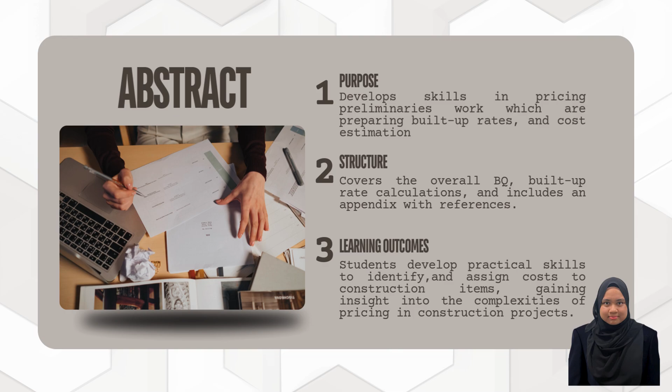In the construction industry, preliminary is an important element that includes the financial and logistical considerations required for a project to be completed successfully. In preliminaries, build-up rates is the method used to calculate the costs related to the initial phases of a construction project. Build-up rates is important for managing the administrative and logistical elements that support the actual construction process. In conclusion, preliminary items is an essential element in construction contracts that offer an outline for efficient project management.

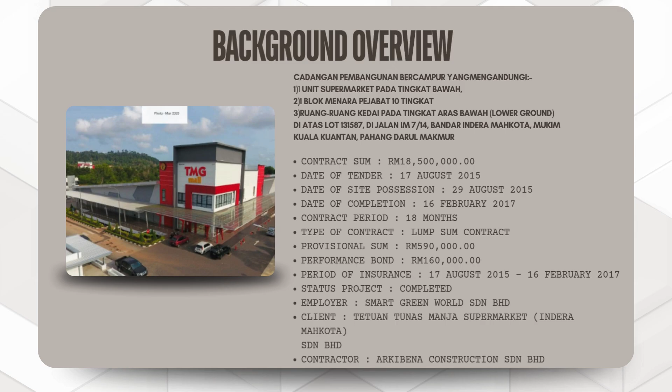The employer is Smart Green World Sendirian Berhad. The client is Tetuan Tunas Manja Supermarket, Indera Mahkota Sendirian Berhad. And the contractor is Arkibena Construction Sendirian Berhad.

Next, on this slide we show the actual bill of quantity from this project. There are 32 preliminaries items in this 18 million project, but for this assignment, we only chose 20 items of preliminaries to come up with the current amount or cost for each item, which means each of us had to take 5 items to present.

So I will start with the main subtopic, which is build-up rates. I chose 5 preliminaries items, which are plant equipment and vehicle, first aid kits, water supply, and temporary holding and storage.

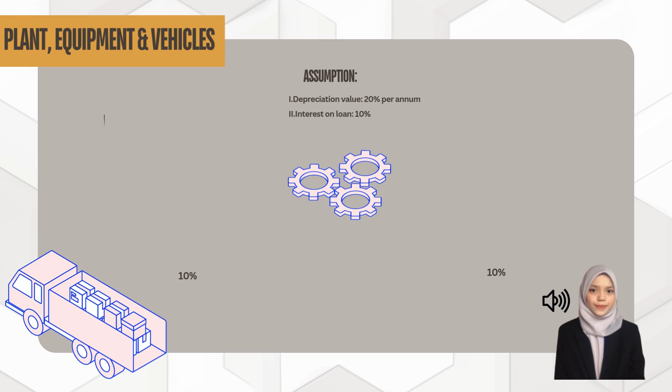The first item is plant equipment and vehicle. In construction, this item refers to the machinery, equipment and tools used for any project, either building or infrastructure. The contractor should provide the plant and equipment to carry out and ensure the construction activities run smoothly. As shown in this slide, first thing first, we must determine whether the project involves rent or purchase for each item.

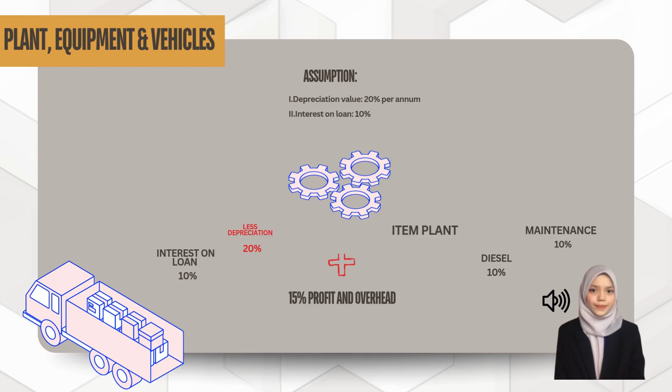The total cost for that item will be added with the 10% interest on the loan, and after totaling up the cost, then must deduct a depreciation of 20% with the year of the project, which is 1.5 years.

The next part, rental item, contains a crawler crane, 2.5 ton forklift and mobile crane. Total up the amount and add 10% for each diesel and maintenance. Lastly, add a 15% profit and overhead, and the cost is 892,495 ringgit 96 cents.

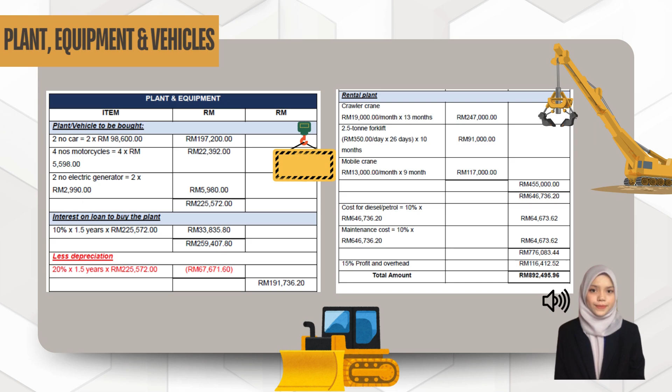A first aid kit for a construction site is specifically made to handle any accident or injuries that might happen on site. The contractor is responsible for providing and organizing all the components in the first aid kit at the site office. A first aid kit is important and has been issued by the Department of Occupational Safety and Health, Ministry of Human Resources Malaysia, to be performed by a first aider during an emergency until medical personnel arrive.

For this project, first aid kits should be more than one because this is the biggest project, and should be enough for all the workers. I got this price from Vitalfour Medical. This company is a Malaysian top-rate first aid kit manufacturer and offers certified kits and trusted products. The total cost for 2 stocks of first aid kits is 1,872 ringgit 94 cents.

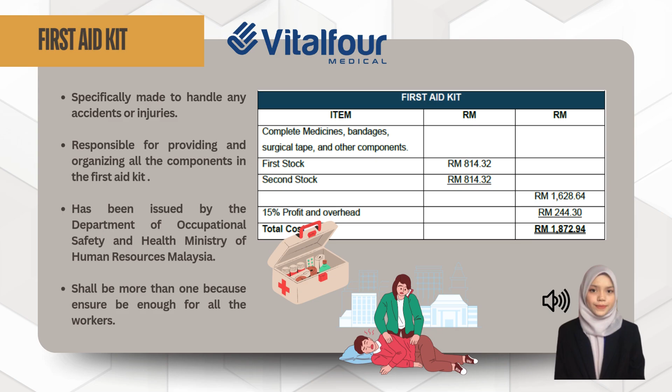A temporary water supply on a construction site is a short-term water source made available while the project is being built. The contractor should provide this for construction-specific activities like mixing concrete, curing, and cleaning equipment, to guarantee workers have access to water for drinking, sanitation, and dust control. There are 2 steps to calculate this cost.

First, installing the services contains fixing pipe, 1,715 gallons water pump, and water bills. Then the cost for dismantling all items on completion contains the rental lorry and labor.

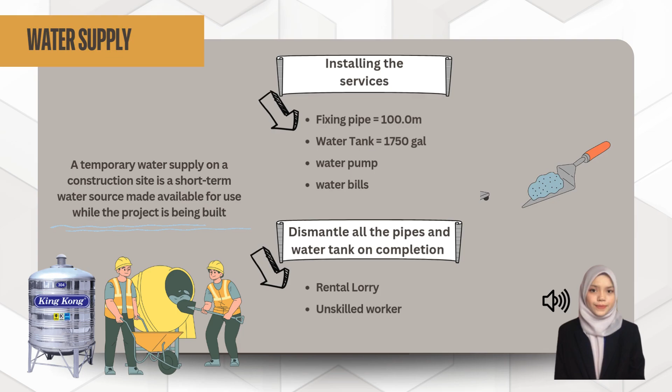For the price of fixing pipe, I assume 60 ringgit per meter. Water tank from the King Kong Company product, and water bills I assume 400 ringgit per month. For lorry rental, I got the price from the quantity surveyor online website, and unskilled labor is 85 ringgit per day from the JKR rates.

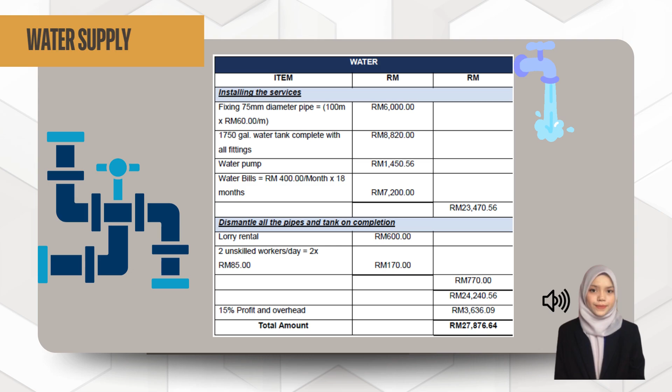The total cost for the water is 27,876 ringgit 64 cents. Temporary hoarding is a barrier or fence erected around a construction site to secure the area, protect the public from hazard, and reduce noise and dust pollution.

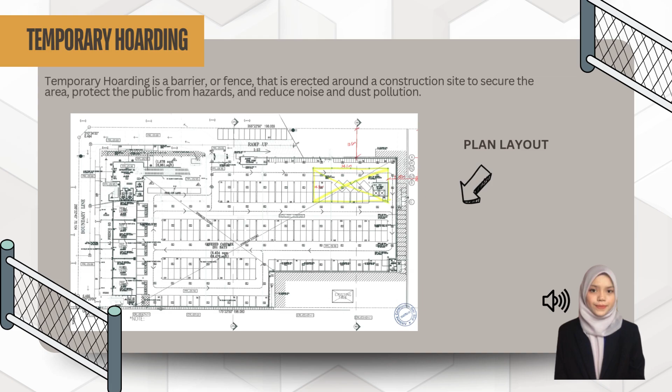As shown in this slide, this is the plan layout for this project. The hoardings will cover around the construction site. After measuring the perimeter around the site, the hoarding needs 550 meters, and I got the price per meter for hoarding, 110, from the quantity surveyor online.

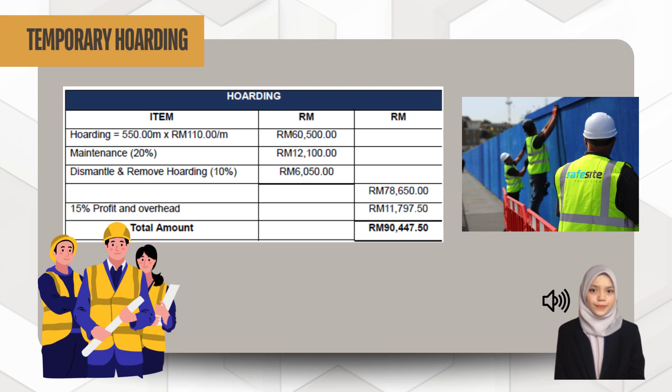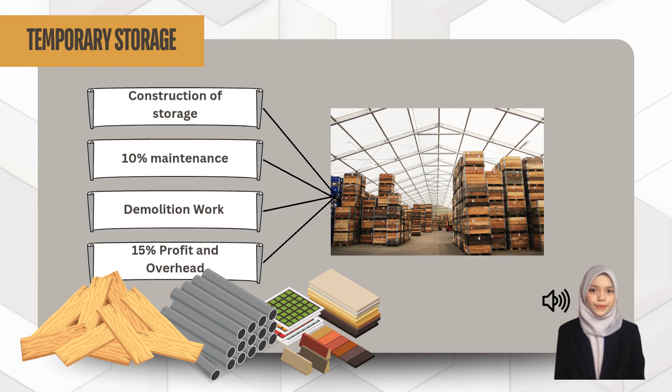The total cost for temporary hoarding is 90,447 ringgit 50 cents. As stated in the slide, temporary storage contains 4 components: the construction of the storage, 10% maintenance, demolition work, and profit and overhead. These storage spaces are essential for maintaining the site's organization and protecting material from environmental elements, stealing, and destruction.

So here are the build-up rates for this storage. The cost for construction of storage will be added with the cost of demolition work, and then from the total we add the profit and overhead at the standard percentage, which is 15%, to get the total cost for the storage.

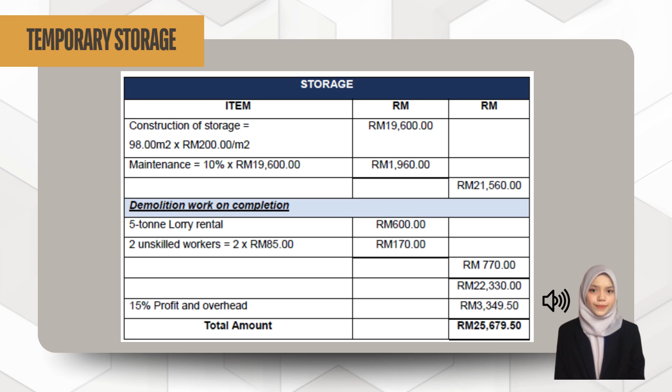The next item to be considered in the preliminary items is level and setting out, also known as a site survey. A site survey is the process of conducting a thorough examination and assessment of a proposed construction site before any development and construction work begins, to obtain data and information.

To find out the total amount for site survey, land surveyor professional fees and surveyor equipment need to be taken into account. Border setting out and grid setting out are part of the professional fees. As for the surveyor equipment, the cost of theodolite and dumpy level need to be counted.

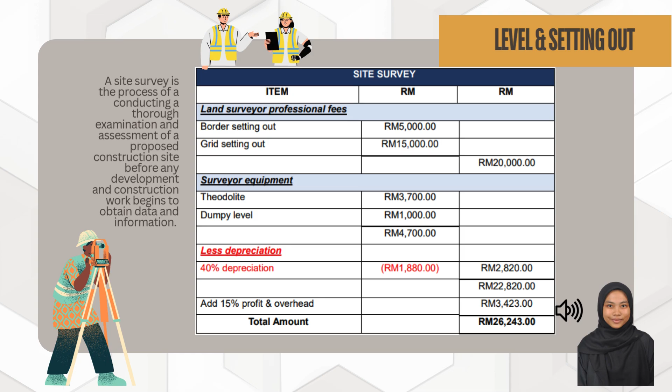After totaling the cost of professional fees and surveyor equipment, the total amount needs to be deducted by 40% depreciation. Finally, profit and overhead is added at the rate of 15%. So the total amount for site survey for this project is 26,243 ringgit. The next item for build-up preliminaries is contractor all-risk insurance (CAR).

Contractor all-risk insurance protects against losses and damages that can occur during construction projects, such as property damage, third-party claims, construction plant and equipment, and clearing debris. To find out the rate of contractor all-risk, two items are taken into account.

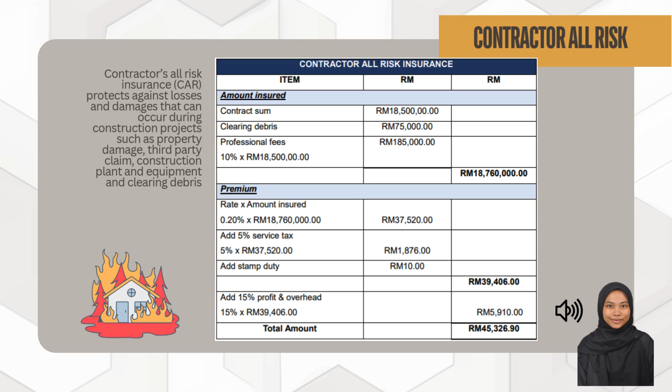The first item is contract sum, clearing debris, and professional fees added together. The second item to be considered is premium: a rate of 0.20% times the total amount insured. 5% service tax and stamp duty of 10 ringgit are added into the cost.

15% profit and overhead is taken into account to find out the final amount. The total amount for contractor all-risk insurance is 45,326 ringgit and 90 cents.

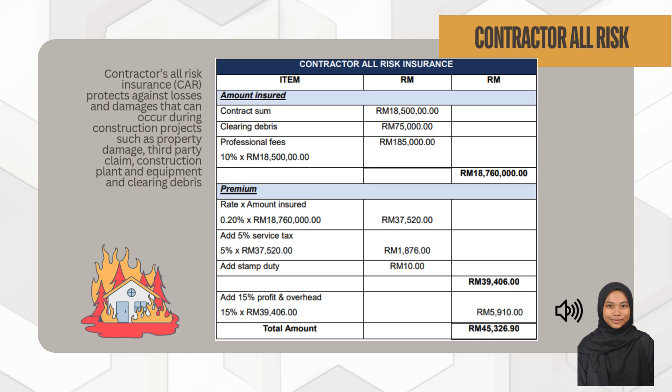The next item is SOCSO, the Social Security Organisation, also known as PERKESO, a Malaysian government agency that provides social security to employees in the private sector in case of workplace injuries, emergencies, occupational sickness, and death. Contribution to SOCSO is mandatory for every worker under a contract of service in the private sector.

To determine the total amount of SOCSO, the estimated monthly salary of the workers is calculated. This data is obtained based on checkout rates online. The total monthly salary of the workers is multiplied by the project duration. The client's contribution at a rate of 1.75% is added to the calculated amount, then profit and overhead is added to get the total amount.

The total amount for SOCSO is 50,624 ringgit and 44 cents.

The next item to be considered is temporary electricity supply. Temporary power supply is a connection on site to give an electrical supply for the construction works. Cost components to be considered include the wiring cost and other related equipment, monthly bill, deposit to the relevant authorities, and dismantle costs after completion of the project.

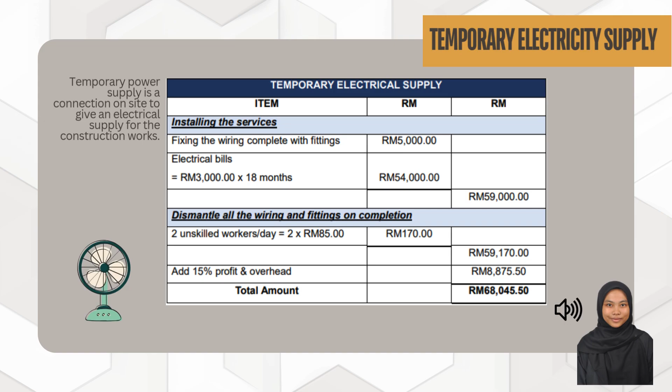For this element, it is divided into two parts: installing the services fees and dismantling all the wirings and fittings on completion. The total amount for temporary electrical supply is 68,045 ringgit and 50 cents.

The next one is signboard. Signboard must be prepared, installed, and well maintained by the contractor at the project site, stating the title of the project and the name list of parties involved. After completion of the project, the signboard needs to be demolished.

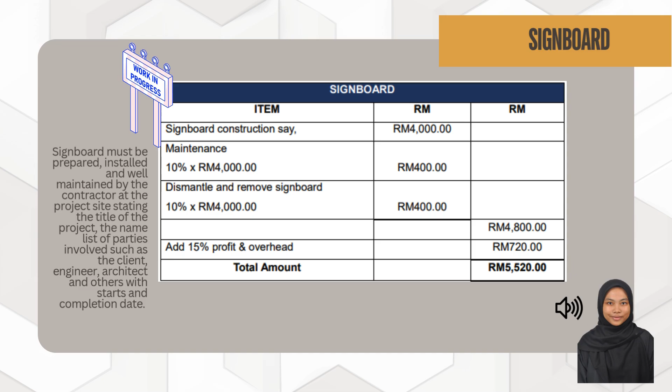To find out the cost of signboard for this preliminaries item, signboard cost needs to be added with 10% of maintenance and 10% for dismantling and removing signboard cost after completion of the project. The total amount for the signboard in this project is 5,520 ringgit. The next item is workman compensation.

Workman compensation is the insurance that shields employers from legal liabilities to offer monetary compensation to employees who are injured at their place of work or those with work-related illness. It includes injuries and diseases that happen while the employee is under the employer's service.

For the calculation, I assume the rate is 2% and estimated worker income is 10% of the contract sum. The contract sum here is 18,500,000. We need to add 5% service tax and 2 ringgit for stamp duty. The total after 15% profit and overhead is 44,679 ringgit and 80 cents. The next item is temporary workman accommodation.

This means housing facilities which are provided to the employees for work during their period of temporary or contract employment. This type of accommodation provides no more than living facilities such as sleeping, eating, and washing facilities, which may be located near the place of employment. It is typical for sectors like construction works, agriculture, or events when employees can be temporarily on the move.

The housing options are often basic and inexpensive and may include the sharing of certain areas such as dorms or kitchens. They can be temporary structures like modular buildings, or normal structures which have been converted for the purpose. These types of housing are normally offered by employers so that employees can be close to the workplace, hence their welfare during their working lifetime be guaranteed.

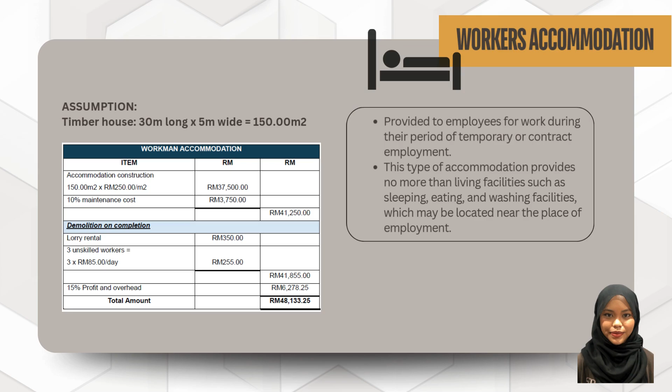For the calculation, we assume the timber house is 30 meters long by 5 meters wide, so the total is 150 meter square. We need to allow 10% maintenance cost, and for the demolition after construction completes, we need to rent a lorry and hire 3 unskilled workers. The total for workman accommodation will be 48,133 ringgit and 25 cents.

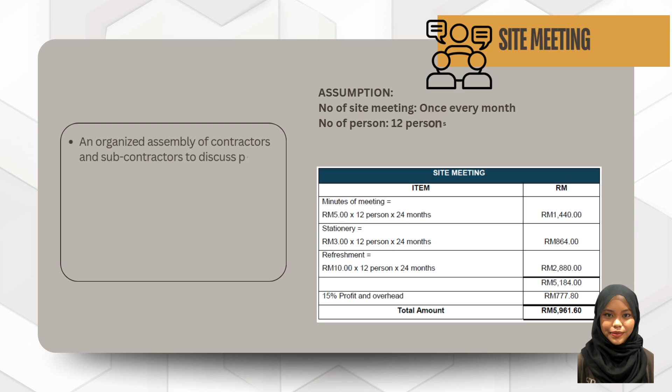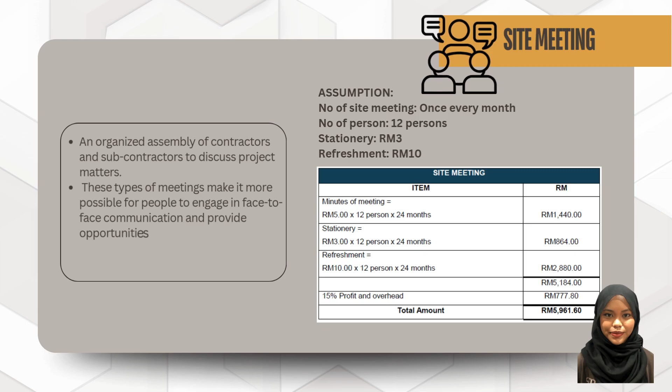The next preliminaries item to be considered is site meeting. Site meetings can be defined as an organized assembly of contractors or subcontractors to discuss a given project's matters. These types of meetings make it more possible for people to engage in face-to-face communication and provide opportunities to ensure the understanding of project goals and objectives, schedules, and expectations. Small group communication assists in fostering mutual understanding and agreement on certain goals since it facilitates pooling of effort.

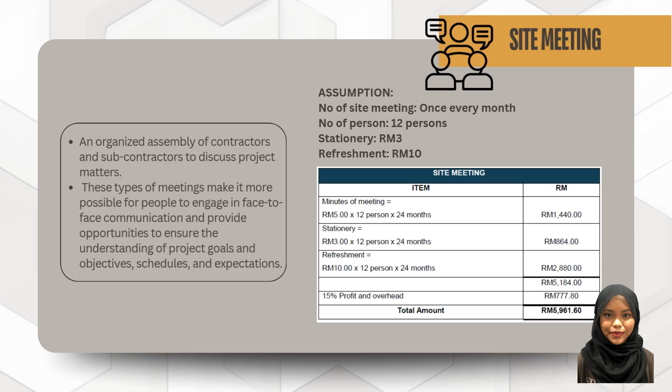For this project, we assume the site meeting will be held once every month, with 12 persons, and the stationery will be RM3 per person and RM10 for refreshments. For the calculation, we multiply the items by 12 persons and 24 months. The total will be 5,961 ringgit and 60 cents.

Progress photograph is applied for the observation of the flow of construction plan, revision, and enactment of safety measures on the construction site. Construction photograph also serves to confirm that construction has been done well.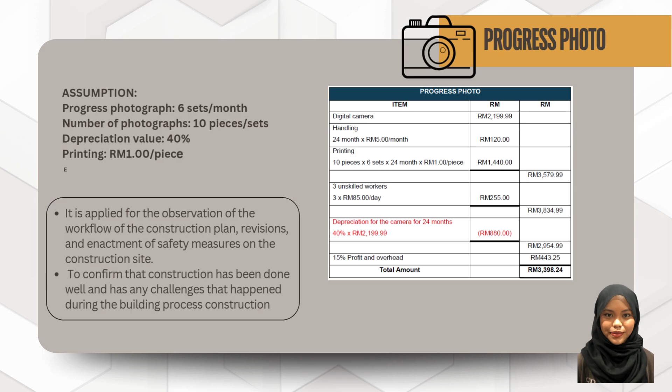Construction photography is the best document to prove and a visual insurance policy, aimed to capture mistakes, assigning contracts, checking independent MEP, trade contractors, and marketing service. When the construction project is accused of causing harm to a neighboring party, pre-construction photo documentation offers proof of the state of the property before construction begins.

This simple and low-cost documentation is often admissible in court and may be taken at set intervals during the construction process to show new conditions or lack of responsibility in case there is harm to the neighbor's property. Construction progress photographs may be used to record contractual completions, advertising images for promotional presentations in the media, or to demonstrate skills in bid proposals.

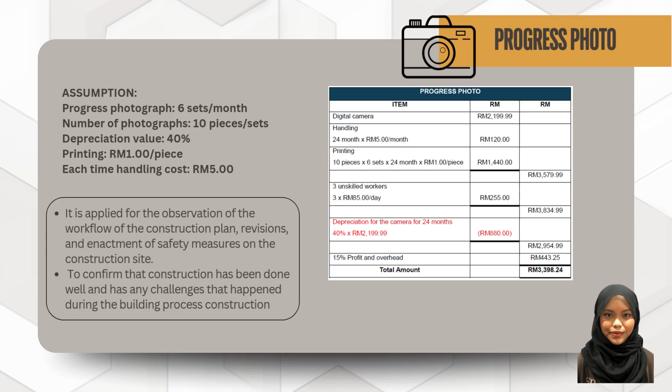We assume in this project, progress photograph is 6 sets per month. Number of photographs is 10 pieces per set, and we need to allow depreciation value of 40%. For the calculation, we need to hire 3 unskilled workers and less with depreciation for the camera for 24 months. The total will be 3,398 ringgit and 24 cents.

Telephone as a communication instrument is crucial in construction since it facilitates interaction of the workers, managers, and other stakeholders who are in different locations. As a real-time communication tool, it enables users to schedule tasks, deliver on-site materials, and address other on-site issues. In emergencies, the telephone can be used to report or gather response quickly, thus improving safety measures on scene.

Furthermore, it makes quick decisions to create efficient and fast project planning and updates all the stakeholders involved in constructing the building to enhance the construction process.

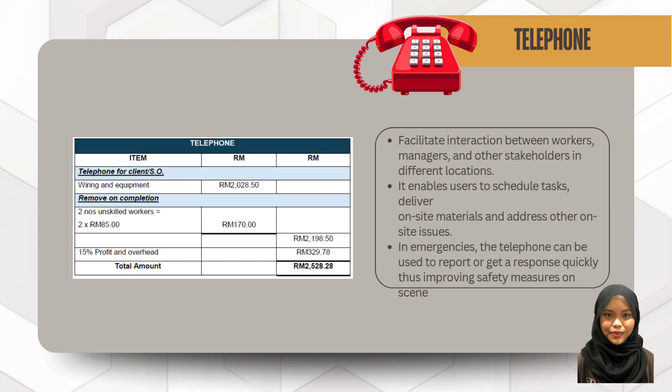For the calculation, we have 2 parts. First, we need to allow wiring and equipment, which is 2,028 ringgit 50 cents, and we need to remove upon completion, so we need to hire 2 unskilled workers. The total amount will be RM2,528.28.

The next item is access to site. Access to site refers to the provision of temporary infrastructure that facilitates safe access to the site during construction. It involves the construction of temporary roads or pathways that enable the movement of vehicles, machinery, and workers in and out of the site, especially when there is no existing access or the site requires preparation for heavy traffic.

There are three assumptions that have been made for this item. First, the area of road is 310 meters square, and the second one is concrete culvert with 750 millimeter diameter, and then the cost of construction road, which includes the clearance of trees, shrubs, stumps, and roots, and the cost of sand and crusher run.

So the total cost is 29 ringgit 90 cents. To obtain the actual cost of this item, the cost of road construction and concrete culverts needs to be taken into account, including the 20% maintenance cost, 10% for demolition work on completion, and the last one is 15% profit and overhead. So our cost is 16,944 ringgit 3 cents.

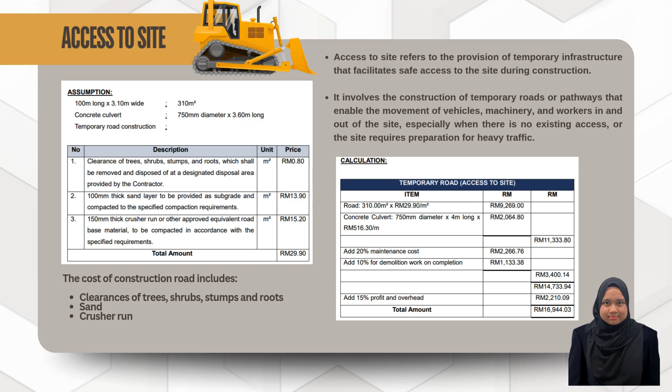So the next item is CIDB levy. The CIDB levy is a tax that contractors have to pay for construction projects with a total value of 500,000 ringgit or more. The levy is calculated at a rate of 0.125% of the project's overall value and must be paid prior to the commencement of any construction activities. This payment ensures compliance with industry standards and secures the necessary approval from the Construction Industry Development Board.

If the levy is unpaid, the contractors may face legal issues or penalties. To obtain the cost of levy, the levy is calculated at a rate of 0.125% of the project contract sum, which is 18,500,000 ringgit, and then include with a 15% profit overhead. So the overall cost is 26,593 ringgit 75 cents.

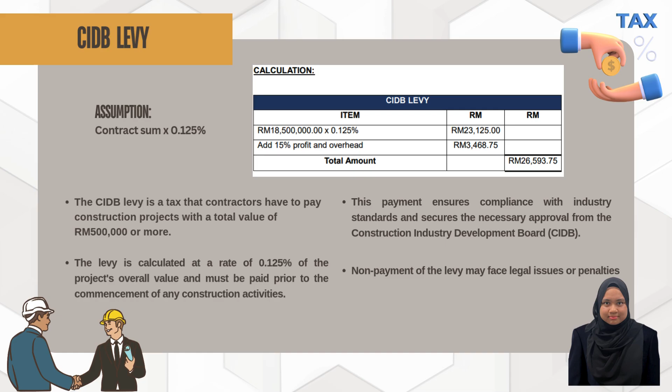The next item is monthly progress report. A monthly progress report is a periodic document summarizing the progress of a construction project, including updates on completed activities, ongoing work, milestones achieved, challenges encountered, and other relevant details. Additionally, it serves as an official record for compliance, support interim payments, and provide the basis for claim or any adjustment if variation in scope, time, or cost are required.

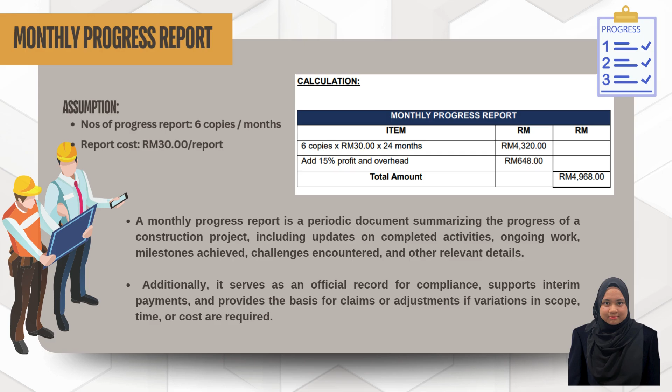For the calculation of this item, we have assumed that the report has 6 copies and each copy is 30 ringgit, and then includes with 15% of profit and overhead, so our cost is 4,968 ringgit only. The next item is site office.

Site office is a temporary structure or facility set up at a construction site to serve as the central hub for managing and coordinating project activities. It provides workspace for project managers, engineers, supervisors, and administrative staff to oversee operation, hold meetings, and handle documentation.

As we can see in the calculation, it includes the cost of foundation preparation, cabin, air conditioner, table and chair for staff, meeting table and chairs, file cabinet, computers, printer, and photostat machine, and then maintenance costs and then dismantle on completion costs. In maintenance cost, the cost of cleaner is included, where the total working hours is 3 per hours per day with 14 ringgit per hour. The cost is 26,208 ringgit for 24 months.

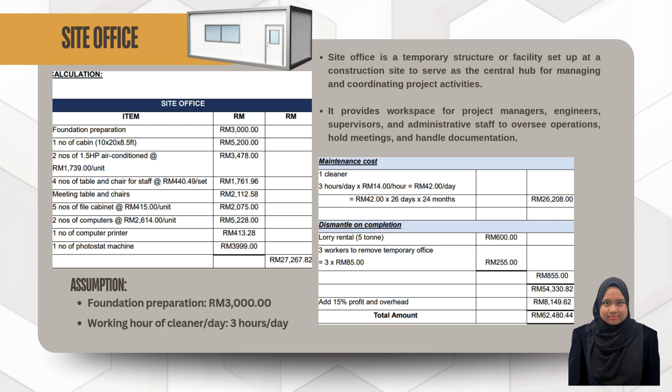For the cost of dismantle, the cost of lorry rental and 3 labours are included, which add 15% of profit and overhead. That costs 62,480 ringgit 44 cents. The next item is as-built drawing.

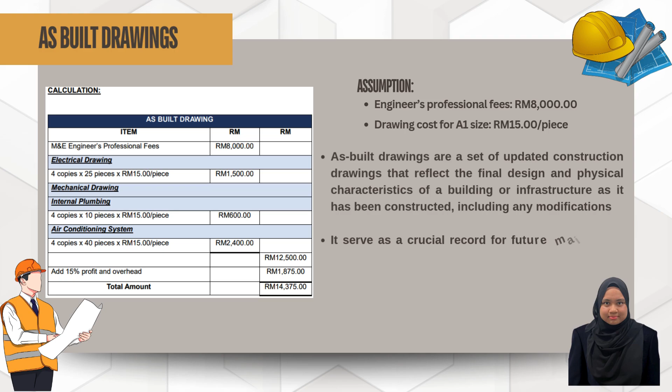As-built drawings are a set of updated construction drawings that reflect the final design and physical characteristic of a building or infrastructure as it has been constructed, including any modification. It serves as a crucial record for future maintenance, renovation, and repairs, providing a reliable reference for understanding the completed work.

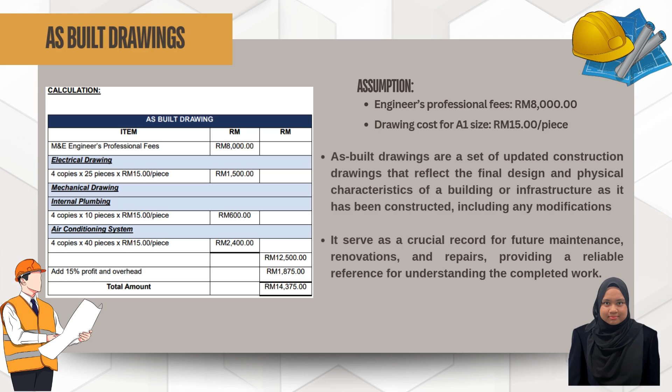To obtain the cost for this item, the cost of engineer professional fees, electrical drawings and mechanical drawings are included. The fee of professional engineer is 8,000 ringgit per month, and the cost for A1 size is 15 ringgit per piece. So the subtotal will be added with 15% profit and overhead that costs 14,375 ringgit.

To conclude, the analysis of built-up rates for preliminaries work is crucial for accurate cost estimation and project pricing in construction. This assignment explores the cost components of preliminaries work items, emphasizing direct costs and indirect costs. Accurate calculation of these rates are vital for project budgeting, financial planning, and resource allocation, enabling quantity surveyors to provide precise cost estimate and support informed decision making.

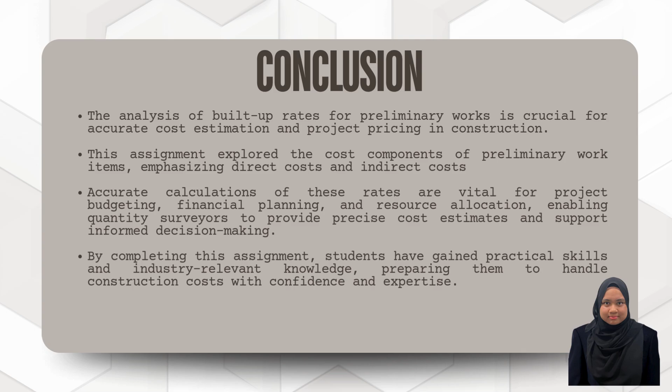By completing this assignment, students have gained practical skills and industry relevant knowledge, preparing them to handle construction costs with confidence and expertise.